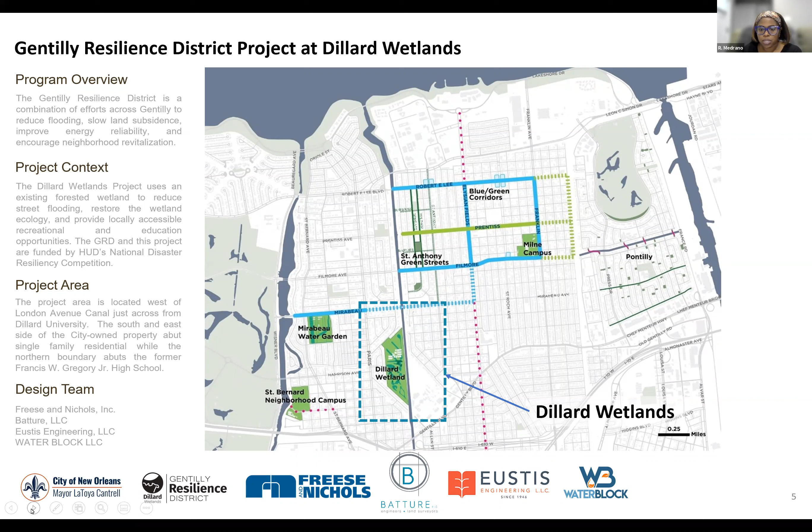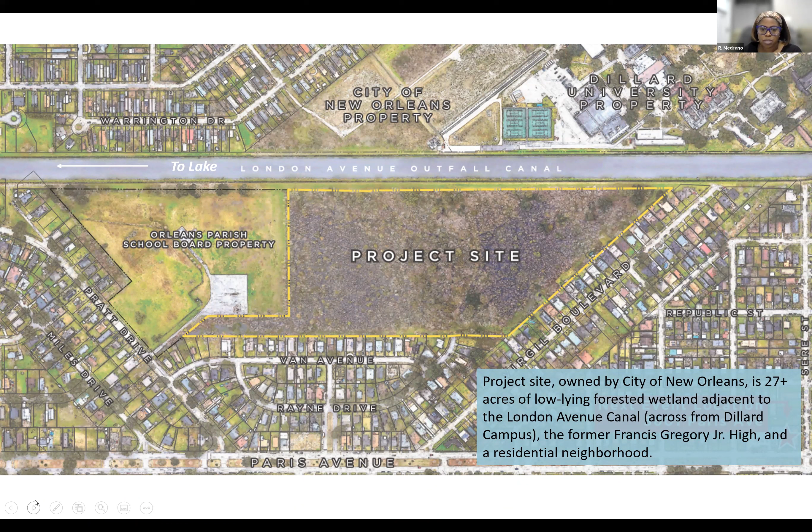You can go to the next slide. This is just the area of where the project is—the former Francis Gregory Junior High School and the surrounding residential neighborhood. Go to the next slide.

The project goals and benefits are to manage urban water, reduce localized flooding, and improve water quality in the area. Also to restore ecology, improve existing forest and wetland conditions, and create community access for recreational and educational opportunities within the forest and wetland site. On the right here are the benefits we're looking to achieve with this project in the future and long term.

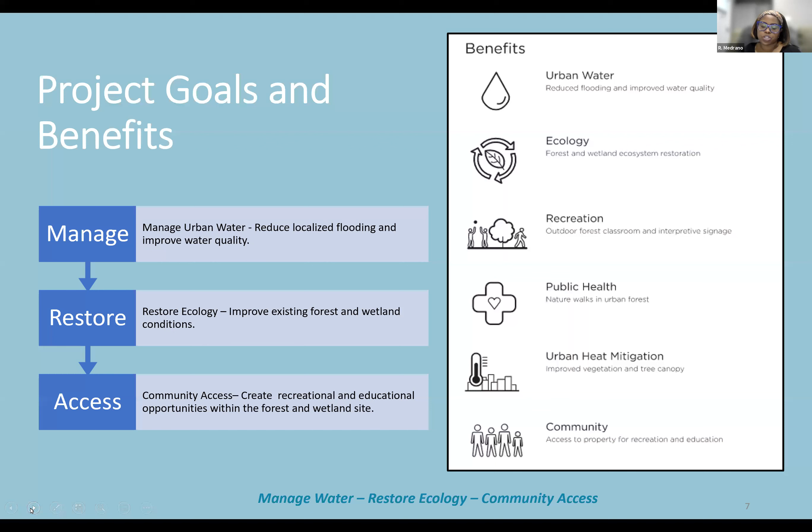You can go to the next slide. Currently we are in the final design phase, and we're looking to begin final construction very soon.

All right, and I'm going to turn it over to Atianna Cordova, the Design Team Community Engagement Lead, to tell you more about what we're looking for and looking to do for the community, as far as our goals for this project. Atianna?

Thank you, Rodriga. As Lisbeth and Rodriga mentioned, my name is Atianna Cordova, and I am the founder of Waterblock, and we've been leading the outreach as part of the design team for this project. You can go to the next slide.

A little bit of context on how we got here today to provide design updates. Within our firm, we lead with the framework of listen, learn, envision, and co-create. Through this project, we've been looking at different ways to engage with community members and stakeholders to garner input for the project, to see what is desired and what's not desired for the final project itself.

We've done this through stakeholder meetings dating back to October 2020. We've also done neighborhood canvassing, where we went into the immediate vicinity of the project and within that neighborhood to talk with residents, both to give them information about the project and to understand what it is that they want to see in the project.

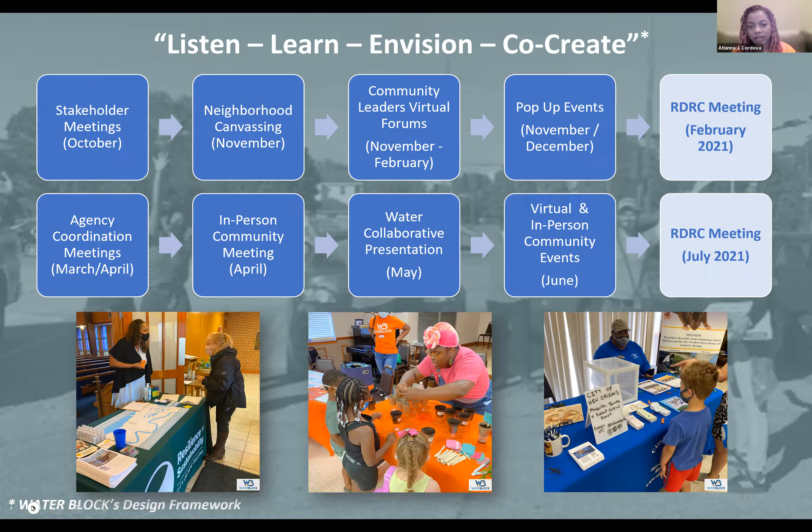For tonight's agenda, based on all the feedback we've heard over the past year, we're going to provide a design update which incorporates a lot of that information gathered. We're also going to discuss site accessibility, and share new updates regarding the Pratt Drive reconstruction and bike integration. To lead us into that discussion, we have Joel Tillery and Andrew Doyle, who will take it from there.

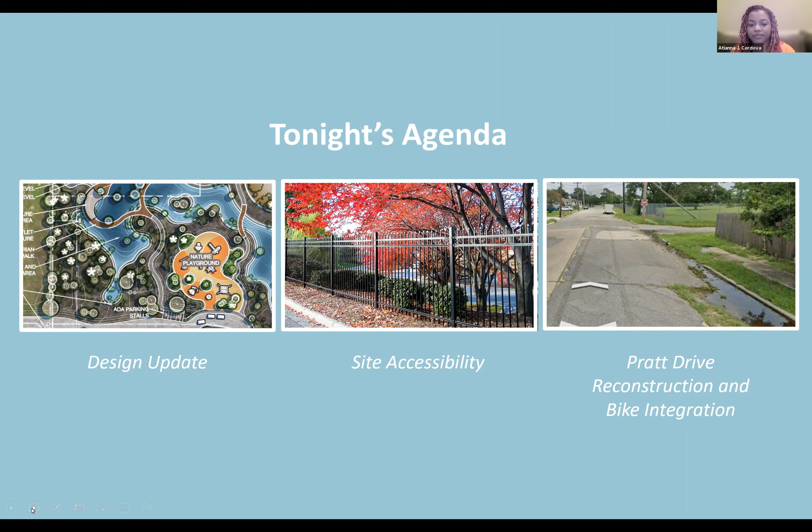Thank you, Atianna. Welcome everyone, my name is Joel Tillery. I am a water resources civil engineer. I've had the opportunity to work on this project, and hope some of you we've talked to before. As Atianna mentioned, we've been working on this for a while now, and wanted to share some updates with you on the design, as well as talk about a couple new things that those of you who have been engaged may not have seen before.

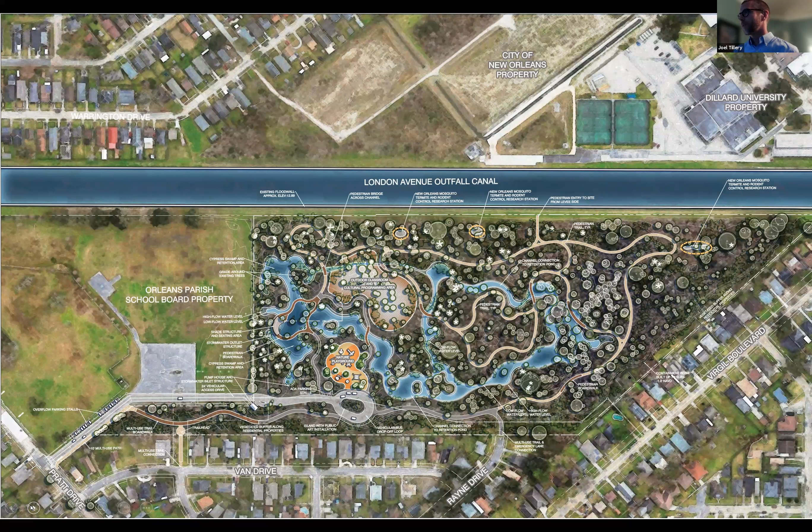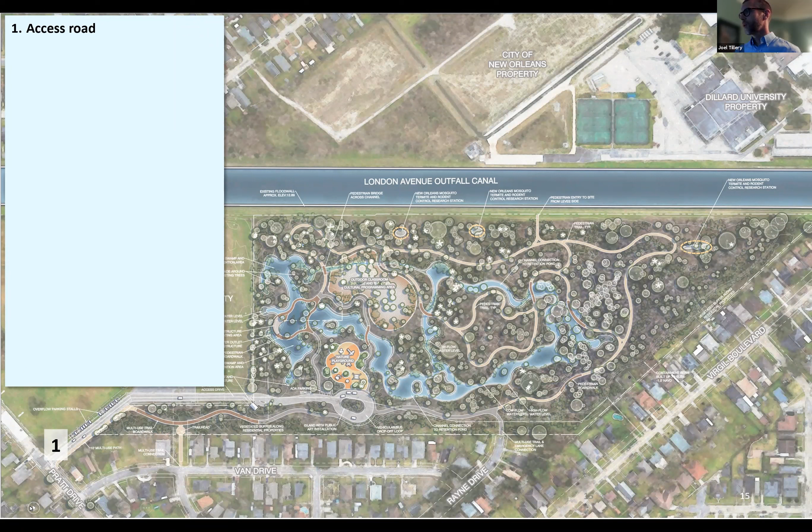So to start, I want to recap some of the things you may have seen. Elizabeth, if you want to click through these slides, this is animated, showing some of the different features of the project. You can quickly jump through here. As you may have seen, we have an access road off of Pratt Drive that will lead into the project site with some parking along that access road.

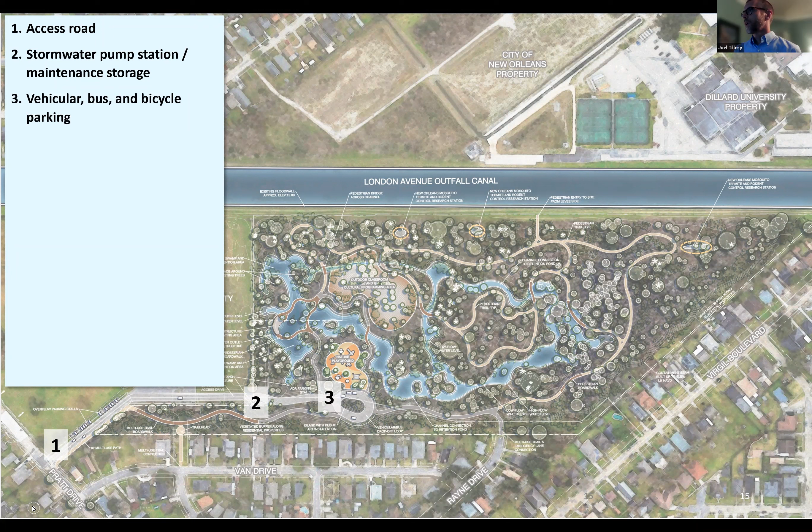As Rodrika mentioned, one of the goals of the project is to reduce flooding. The way we're going to do that is to capture water from the city streets and pump it into the wetland area. There will be vehicular, bus, and bicycle parking with a turnaround loop for people to access in and out of the park. A nature playground will be accessible for kids and adults alike, young at heart.

Buffers and site perimeter - that's one of the things we'll talk about tonight, some of the perimeter control and accessibility issues we've incorporated based on feedback from the residents we've talked to. Walking trails and boardwalks are an integral part of the project that will circulate around and through the project site.

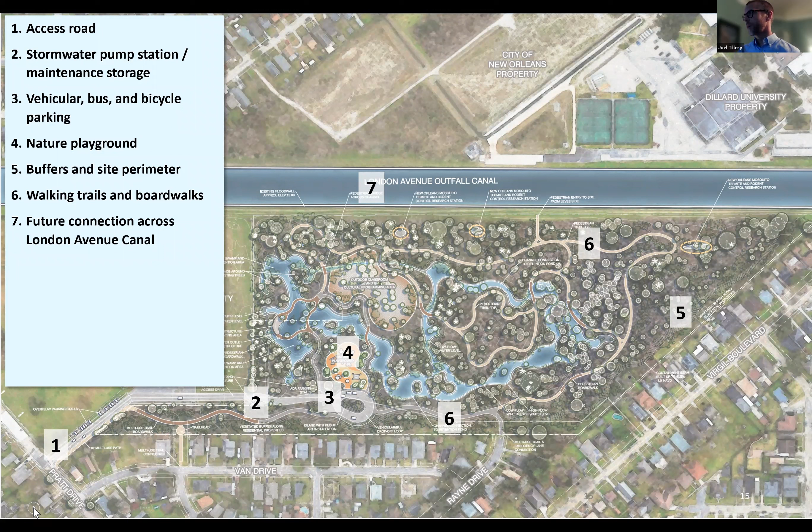There is a concept to, at some point in the future, connect across the London Avenue Canal. That is from the Dillard Wetlands project site, the property the city owns, across the canal to city property that's currently the site of the Parks and Parkways facility. We have Danny McElmurray here from Parks and Parkways tonight, so thank you, Danny, for joining.

Observation areas for wildlife and bird watching, and seating areas for reflection, are going to be spaced throughout the project site. And next is an outdoor classroom in a space that's going to be dedicated for nature-based education.

This is really a feature we're going to be building on. Atiana will talk a little about some of the design steps we're going to take, working with educators and having a roundtable and a forum to begin to fill up that space with what is desired from an educator standpoint. Right now it's kind of a blank slate, and we're looking to advance that design through engagement with those educators. Then integral with the boardwalk, there's going to be a shade structure overlooking what you may have heard us talk about, a cypress pond, in the past.

One of the key elements of the project site is restoring the ecology and the vegetation. So that will be a very nice area with planted vegetation, and cypress trees circling that water feature and those water features you see represented throughout the project site.

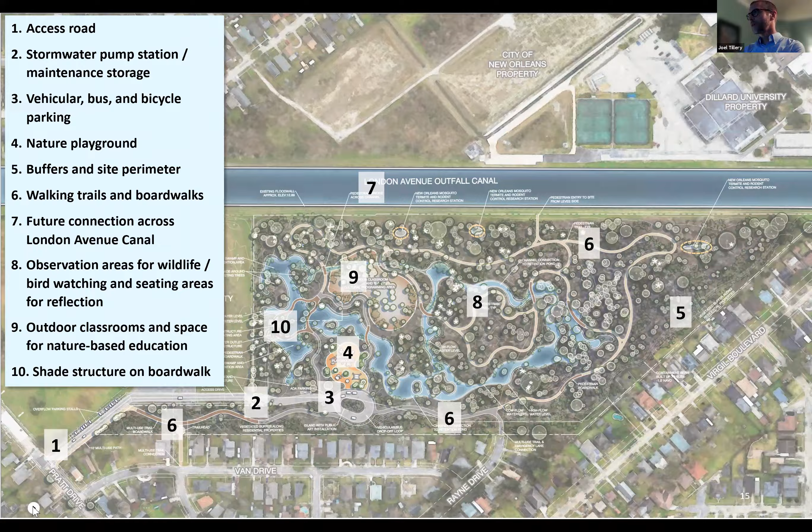So I'm going to turn it over to Andrew Doyle. He's got a few additional slides to walk through some additional details. Andrew? Go ahead and advance, Elizabeth.

Okay, so we're just going to go through the site plan with a series of enlargements here. We're starting kind of in the - can you go back one, please? Sorry.

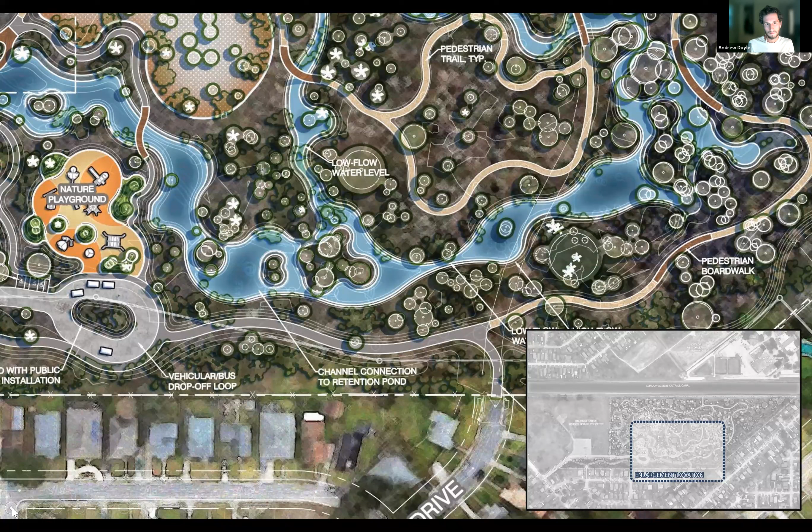I'm still seeing the second enlargement on my end.

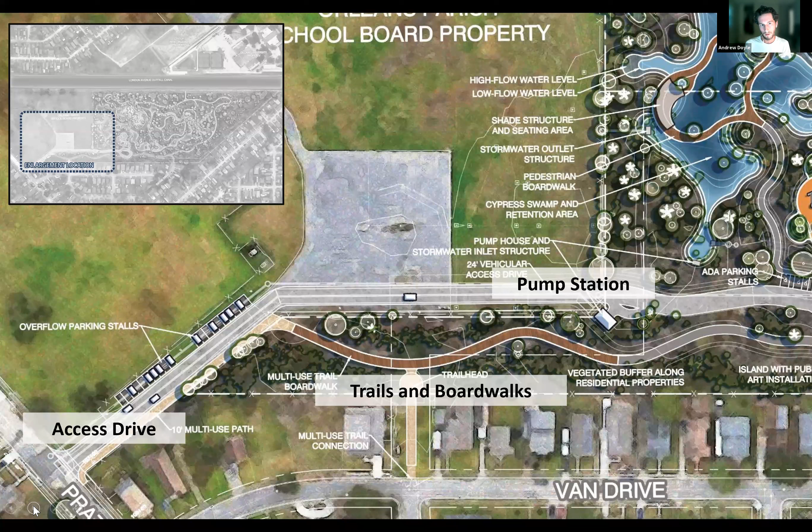Overall, the topography of the site is lowest at this point and climbs up in elevation to the other corner of the property. This created a good opportunity to locate a lot of the programmed portions of the site design in this lower lying corner, where a lot of the water will be stored as well. It creates a unique opportunity to overlap the water management with this programmed development for the user's experience.

Okay, so we're moving further to the south, or plan east here, to the right on the image. You can see the nature playground and how it interacts with the bus drop-off area. We're creating this synergy where if school groups came to the site, it would be really easy for them to access the nature-based playground in relation to where a bus would drop them off.

You can see rendered in the top left corner a dark gray path that loops and connects to that boardwalk I was talking about in the previous slide. That path is envisioned to be ADA accessible, a small loop that connects back from the entryway through the boardwalk and then interacts with that outdoor classroom space.

These tan pathways you see further to the right of the image are envisioned to be looser, like gravel type pathways. So there's this progression from highly programmed to very passive as you move further and deeper into the forest of the site.

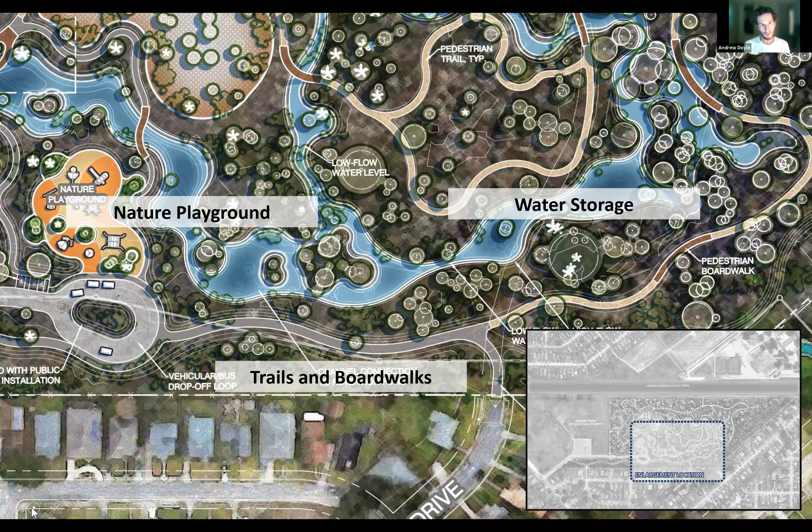Okay, this is along London Avenue Canal in that top left corner. This is a pretty good view of the shade structure and the boardwalk system, and you'll notice this waterway meanders through the site. We manipulated the topography to try to not fight the water, identified the existing areas where the low points are located, and are envisioning that we could sculpt the landscape and connect the fragmented areas where water currently sits. The goal is to maximize the circulation of the water and increase the depth in certain areas to allow different forest communities and mitigate the ability for mosquitoes to breed and populate.

And then you'll see at the top corner, we've identified the current location of the mosquito, termite, and rodent control research stations, and we're envisioning those to stay pretty much where they're located. The trail network is laid out to not have a detrimental effect on their operations, but still provide access on their own.

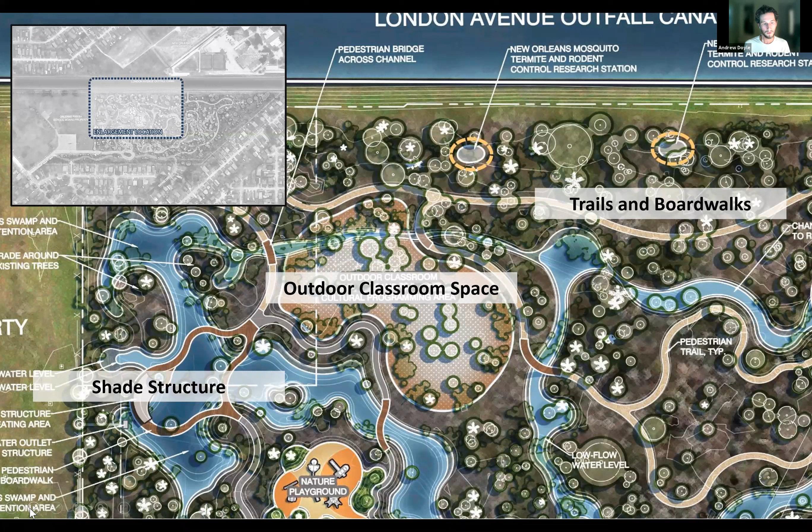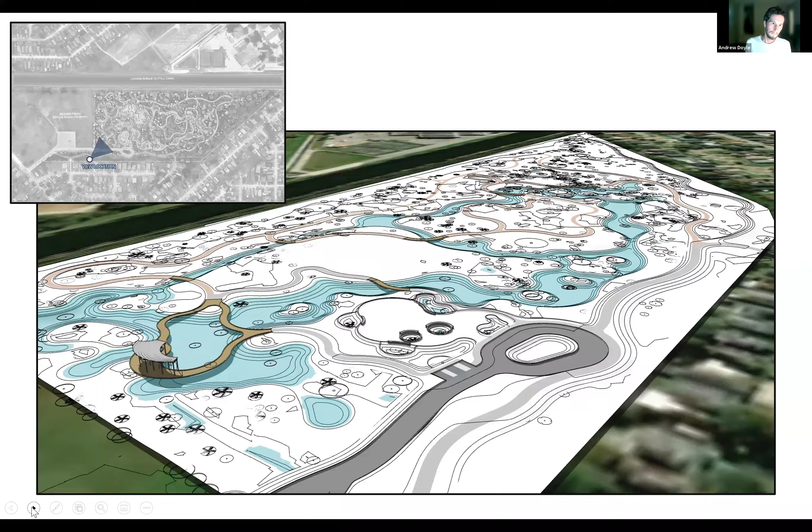This is a closer up image, very conceptual, but we're starting to think about forms for this shade structure and its location. We're proposing this where it is and the shape of it to try to create a large shaded space so we can integrate some seating that interacts well with the outfall structure of the cypress pond, so it could offer an interpretive opportunity for users. There would be seating and signage and things that would illustrate how the wetland takes in stormwater from the surrounding area and reduces flooding, a teaching opportunity that connects to that outdoor classroom further down the boardwalk.

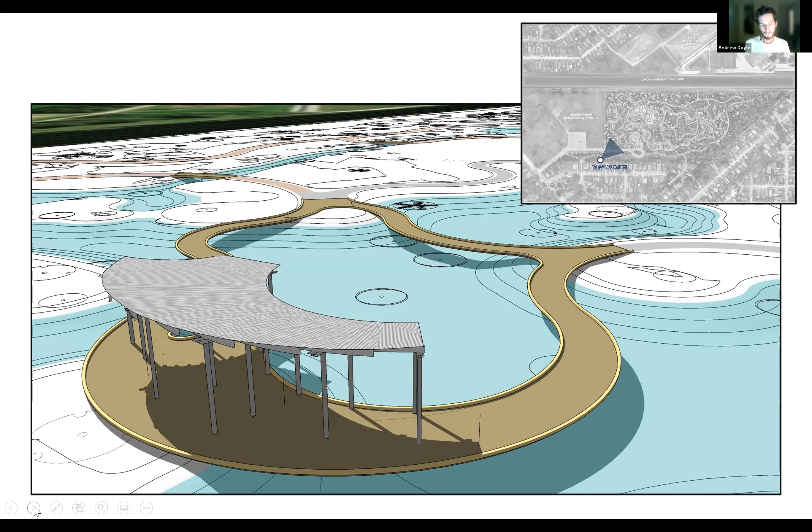And that's one more view looking from the classroom back towards the boardwalk.

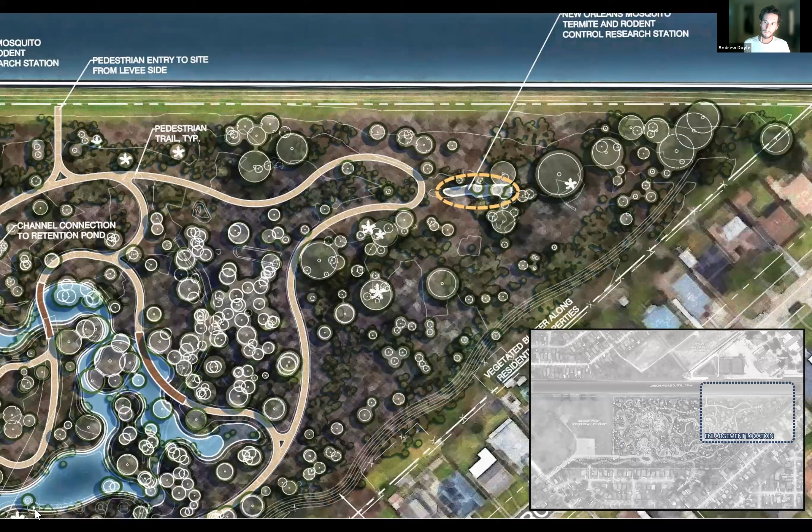This is the highest, more passive corner of the site. We met with the community a lot about buffers, and residents along Virgil expressed their concerns about storing extra stormwater in the site, as well as the public having increased access and being able to see into their backyards.

We've studied a lot of the buffering of the site's perimeter, and Joel's going to speak in more detail about that in a second. Along the property boundary, where that buffer and fencing label is located, you can see about 4 to 6 white lines meandering back and forth. That's essentially going to be like a levee we're constructing on that side of the site, so that if a major storm event occurs, the water is kept within the site.

The water won't be able to top that levee and go into the private properties adjacent to the site. There are several different defenses: the pathway acts as an initial berm, and then we have a secondary one that's 2 or 3 feet higher than the outfall elevation of the drainage system of the site. So we've built in a series of defense mechanisms for that purpose.

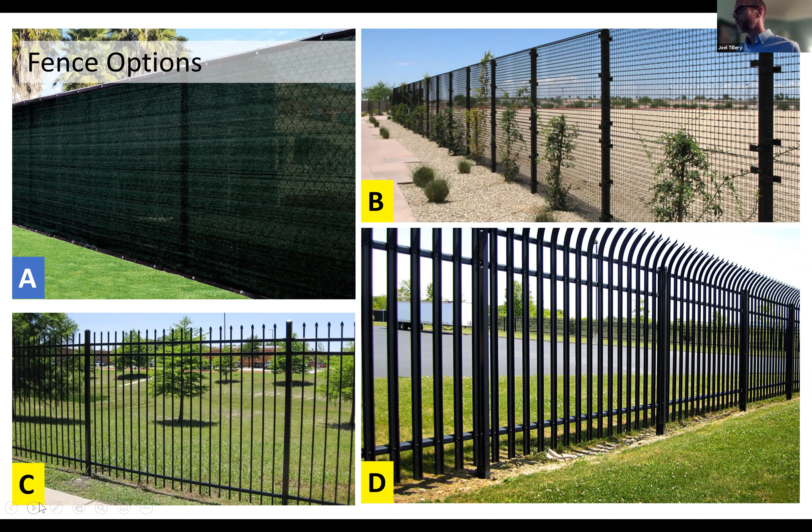These are just some additional options. Part of that chain link fence along the London Avenue Canal could include some tennis screening, just to provide a visual barrier between the project site and the London Avenue Canal. And what you see in B, C, and D are just some additional designs or options for the steel fence that would be around the majority of the site.

Okay, last thing I want to talk about tonight is the reconstruction of Pratt Drive, and an opportunity that we're now pursuing that involves integrating some striping and dedicated bike lanes along Pratt Drive.

One of the things we think about in planning the site is how people are going to navigate to the Dillard Wetlands project. They'll be coming with vehicles, walking and biking. Currently, Pratt Drive is one way, so for vehicular access it'll be coming primarily from the north. But for people biking, to come from the south and up Pratt Drive, you'd be kind of going against traffic.

There are some dedicated bike lanes along Paris, both existing as well as planned as part of the Moving New Orleans Bikes initiative. So we saw this as an opportunity with the pending reconstruction of Pratt Drive, to do a striping plan that would allow bike traffic coming along Paris to take a right onto Pratt Drive and come directly into the project site. It would include some signage and wayfinding to identify the park and provide a means for people to navigate there to experience the park.

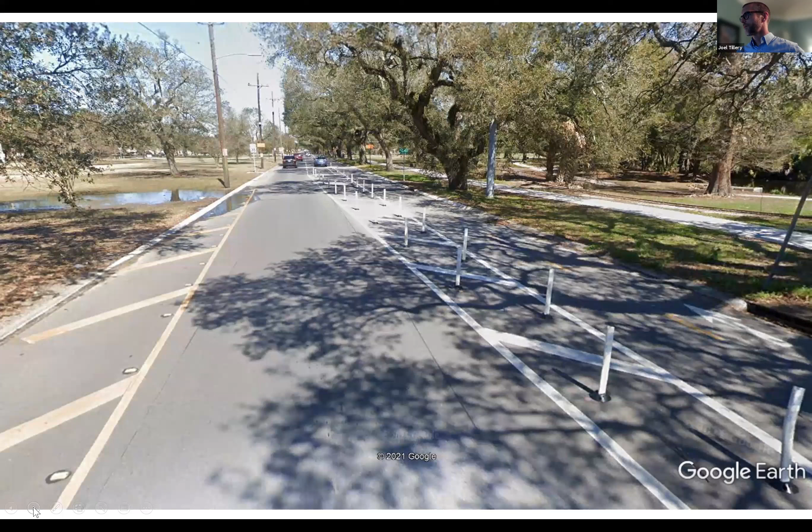This is an example of that. Adjacent to City Park there's Marconi Drive — you all have likely seen this. There's bike traffic that goes north and south, with a dedicated buffer, and you can see some of the bollards here between the travel lane and the bike lanes. This is another image of that, a little further north on Marconi.

That brings us to the end of the presentation tonight. As mentioned, we are in the final design stage, moving towards an RDRC meeting that's also a public meeting sometime in February, with construction anticipated to start in the third or fourth quarter of next year. And with that, I'll turn it back over to Atiana.

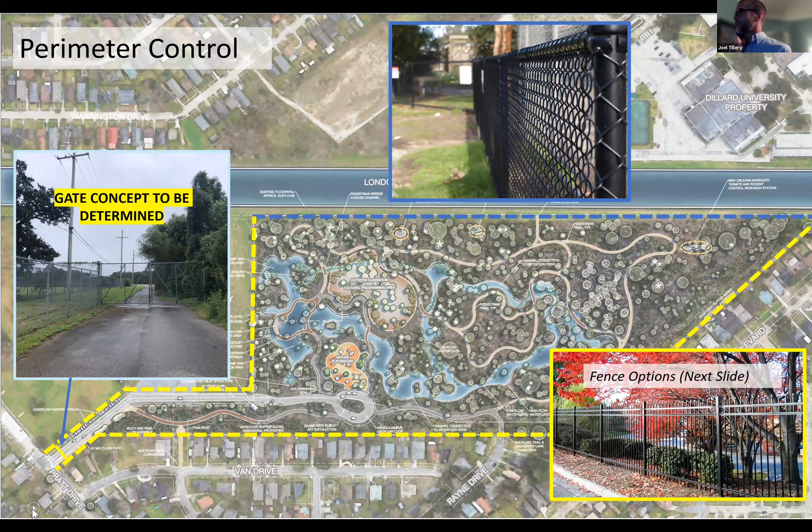Honestly, we would like some feedback from people, and possibly another poll, as to the preference for that buffer zone long term, whether it would be more of a grassed buffer with wildflowers, like a wildflower meadow, or if people prefer more of a forested buffer long term. So if people have opinions about that, share them in the chat or reach out to us with your preference on the type of buffer.

Andrew, you want to add to that? No, I think it's nice to get different perspectives because this is kind of directly tied to that access question. So getting more feedback from everyone on what's preferred along Virgil, I think will help us finalize that.

And I think that's the majority of the questions for the fencing. So we're going to transition a little bit, but I do want everyone to keep in mind that, like it's been shared, we're going to send out a follow-up survey with a little bit more detail about the fence options so you can weigh in if you aren't able to tonight, or if you have other ideas as you marinate on the presentation. So definitely look out for that survey in the next few days.

And it seems like we have some suggestions in the chat box that we'll notate also. So then another question asks, will the parking area allow for water retention?

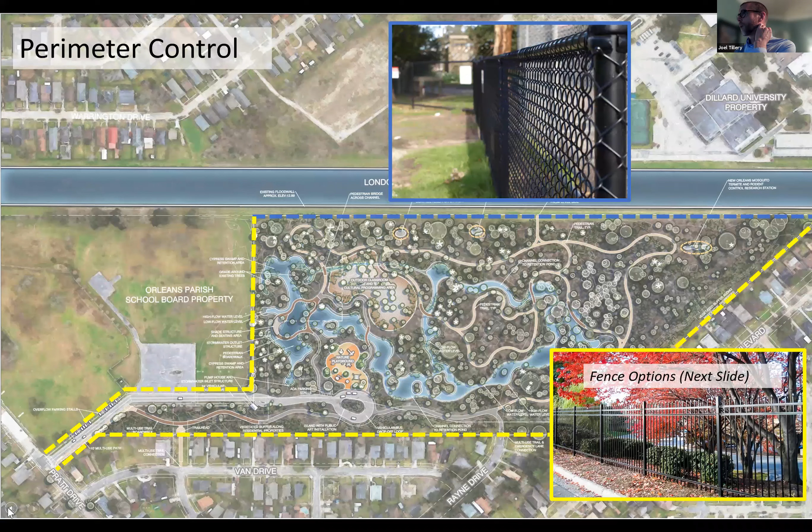We do have Parks and Parkways represented tonight, and they're intended to be the steward for the project site, since their facility is right across the canal. The fencing and gates is something we're still in conversation with them about regarding operating hours. We'd look for feedback from residents as far as hours of operation. I'd suggest daylight hours for vehicle access would be appropriate for the project site—though I may be speaking out of turn regarding the city operating that. From the feedback we've heard from residents, that would be a starting point for the conversation.

Danny, I think the feedback we've gotten was definitely like a daylight park, right? Mm-hmm, that's most of our parks that are fenced. We usually post hours, typically 8 to 6, depending on winter or summer. The end time can vary between 5 p.m. and 7 p.m. depending on the season, but otherwise the parks usually don't open until 8.

Do you mind just introducing yourself, Danny, for those who don't know? Oh sorry, this is Danny McElmurray from Parks and Parkways.

Thank you for that. Okay, so some other questions around maintenance regarding Van Avenue specifically—someone asked, did we answer this one? I think we actually answered that one.

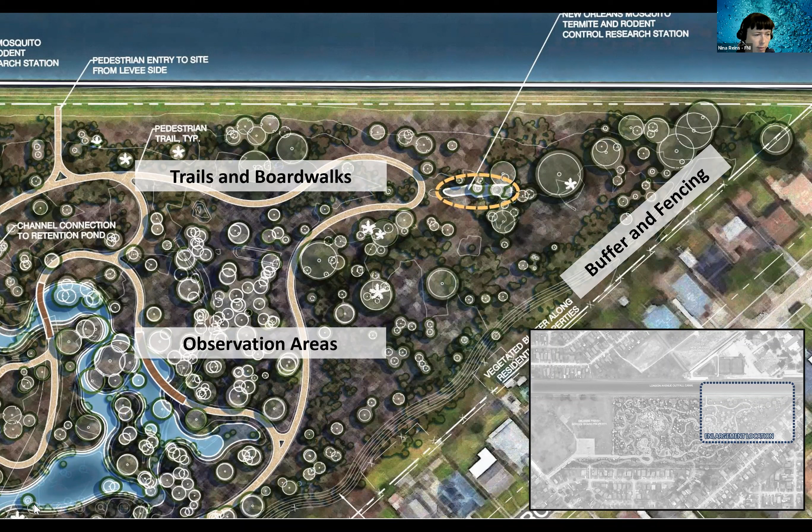I'm not sure I can address that entire question, but with respect to parking on Van, there isn't any dedicated parking—it's not advertised as such, and it's not intended to be vehicular. There's no vehicular access along Van, nor dedicated parking for that access point. It's primarily a pedestrian and bicycle access point. I think signage will lead you mainly to the main entrance on Pratt Drive and not the neighborhood entrance.

Another question specifically about Van is—oh, you lost my place, a lot of questions coming in, give me one second—what is the plan for redirecting water that floods and stands where the Van pathway would be?

So we would like to hear more about that from whoever identified that as a concern, and we would like to address that as part of the project.

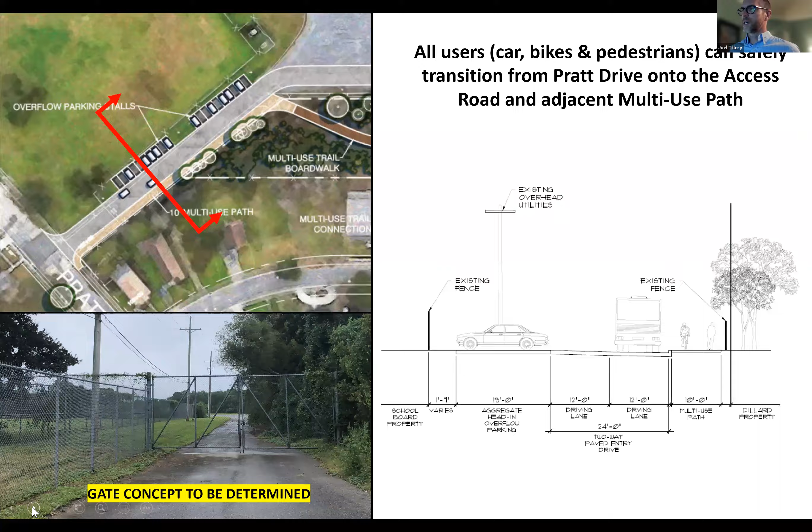The scope of our effort is within the project site itself, within the boundary. So if there is existing street flooding in the area, it could be a variety of causes or sources of that flooding. I will say that the project itself...

Based on relocating the water into the wetland via the stormwater pump station, has a significant benefit on reducing flooding in the surrounding streets. So specifically that exact location, I can't speak to it. I don't have information in front of me to speak to that specific location, but if you send us a follow-up email or give us a call and identify exactly where you're referencing, we can look into that and give you a good response. I may be able to add a comment to address your question right now.

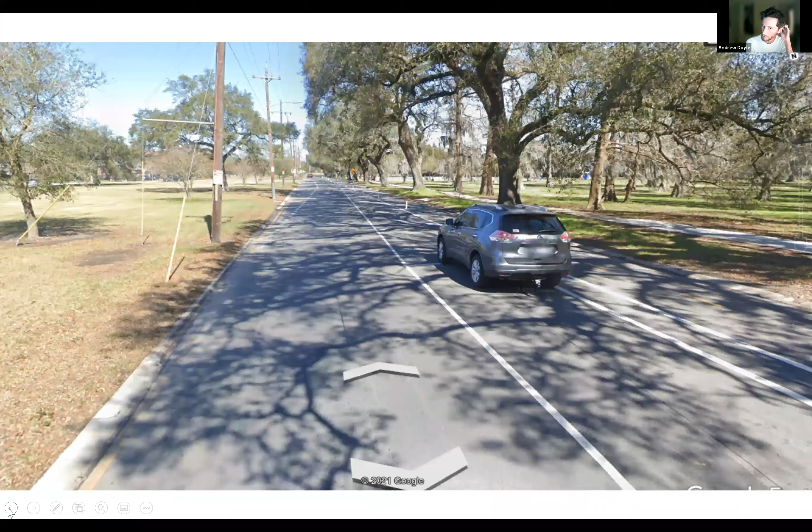Oh, someone else asked, what are the white circles on the map? Not sure which map they're referring to, but I think they're referring to the rendering, that the white circles are existing trees that are native species that will be retained and not removed. Do you remember what slide that's on, Andrew? Just any of the ones that shows the site plan. They're kind of like transparent circles with a thick white outline on them.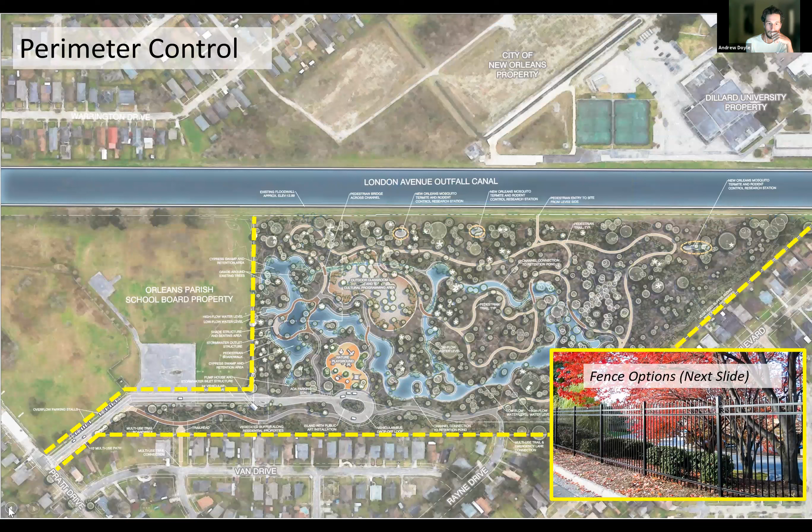And Andrew, I just did the quick math too. It's approximately 1.6 miles then for people that think in miles versus linear feet. There you go, thank you.

Okay, so the person who asked that question, I think it was Jesse. If that's not clear, please feel free to respond again in the chat. But everything else are just notes that we'll take to go into the surveys that we'll send out, and other ideas around the fencing structure. Coach Landrum, I see your comment also, so I'll reach back out to you about that. And I believe that's it.

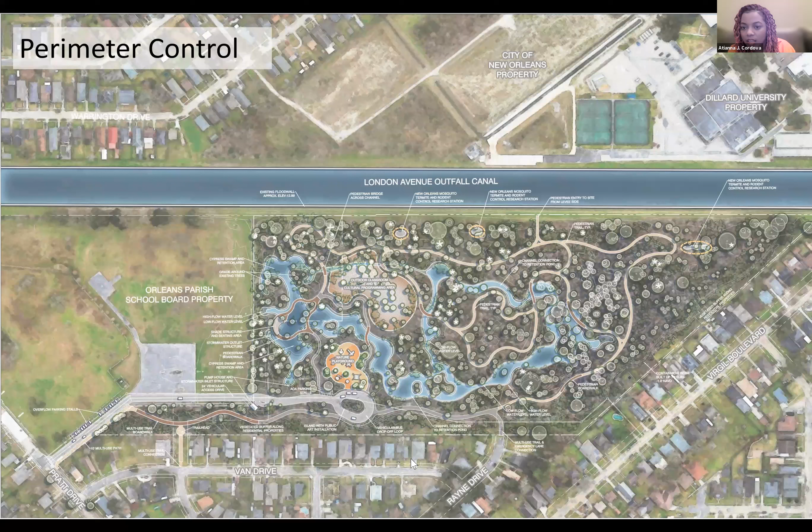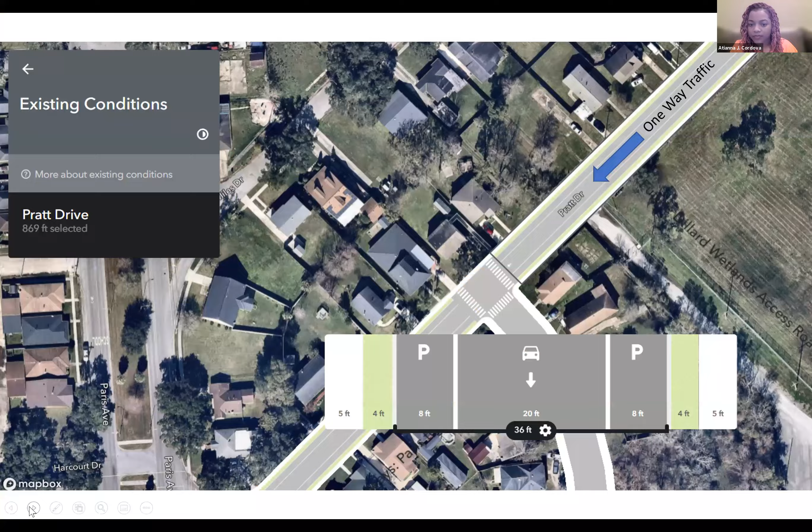If there aren't any other questions, we're gonna move on. I'll give people a few seconds to type any additional ones if they have them. Okay, I think that's all for right now.